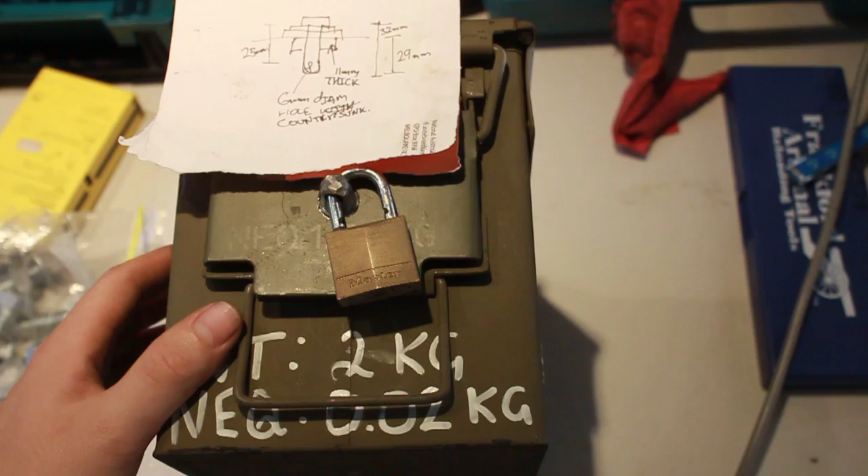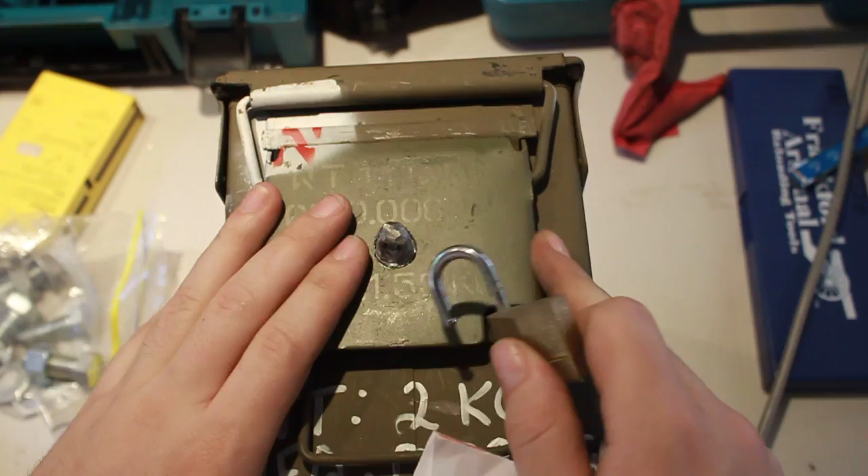Alright guys, I'd like to show you how I make these lockable ammo tins. What you'll need is a lock and an ammo tin. This one cost me $15 from the gun show. It's about the going price here in Australia, $15 for a 50 cal, $10 for a 30 or 20 cal.

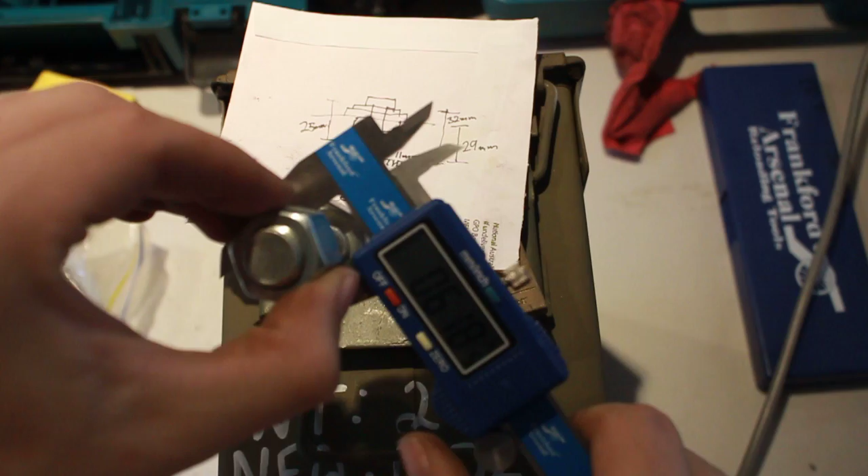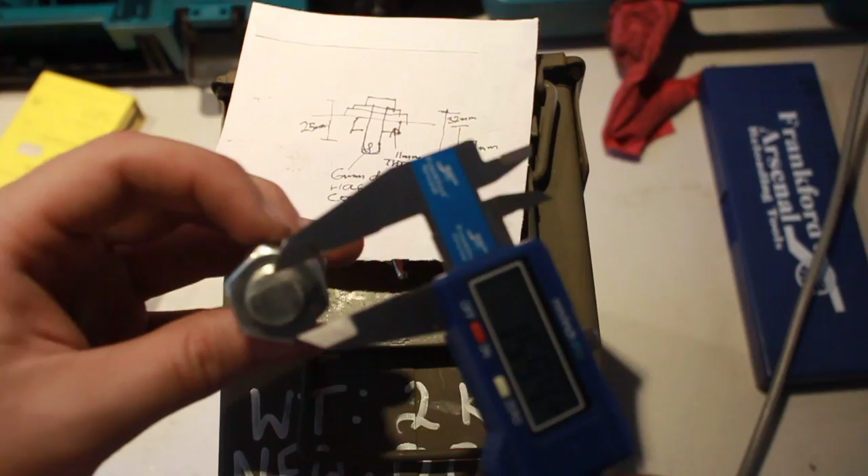Some nuts and bolts, fairly decent size. Let me get the verniers here. This is a 0.619 inch. We go to metric because that's what we use here. 15 mil nut, and the head of it, if you need to know the head, it's 23.

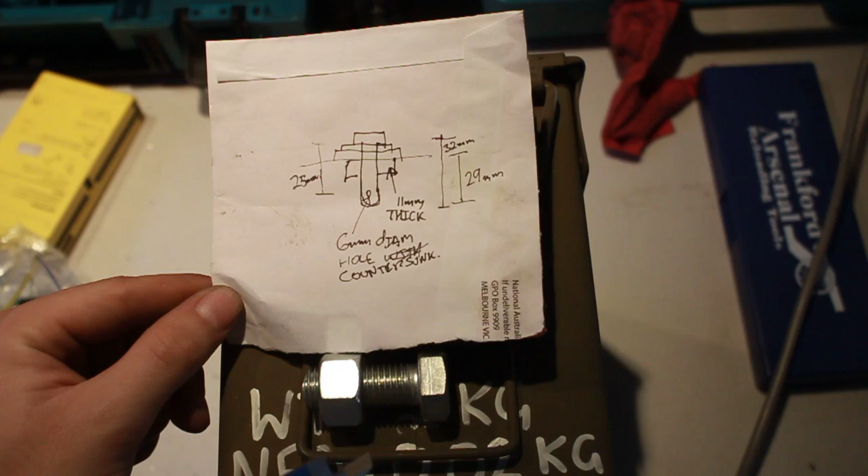You'll need a washer, and you'll also need one of these Fixaloo things. I'll show you where that goes in a minute. These are very rough dimensions, within maybe 3 to 5 mil error. So from there to where the hole goes is 25 mil, 11 mil thick this nut needs to be, 32 mil overall length,

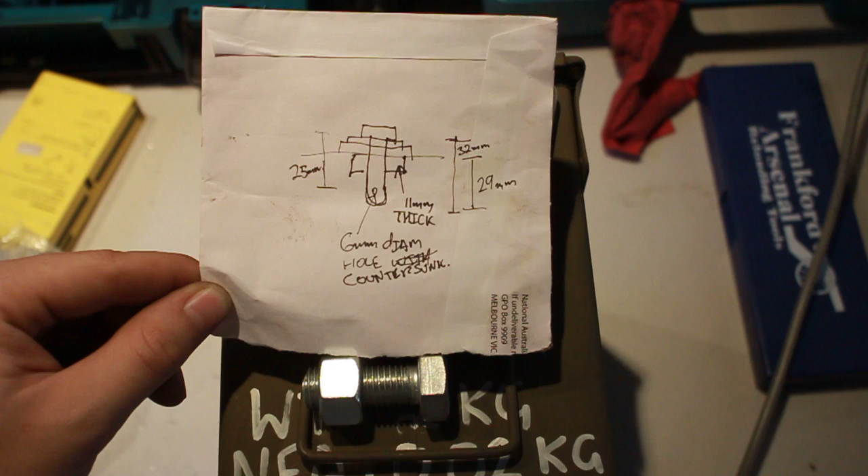and 29 mil from the face, and about a 6.3 mil hole. I think that is 1/4 of an inch in imperial terms. Yeah, 0.25. That's about right. Anyway, so you do that.

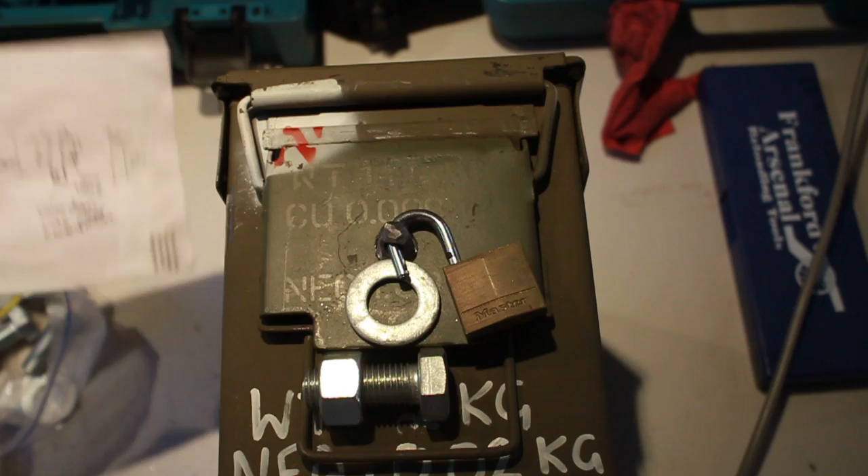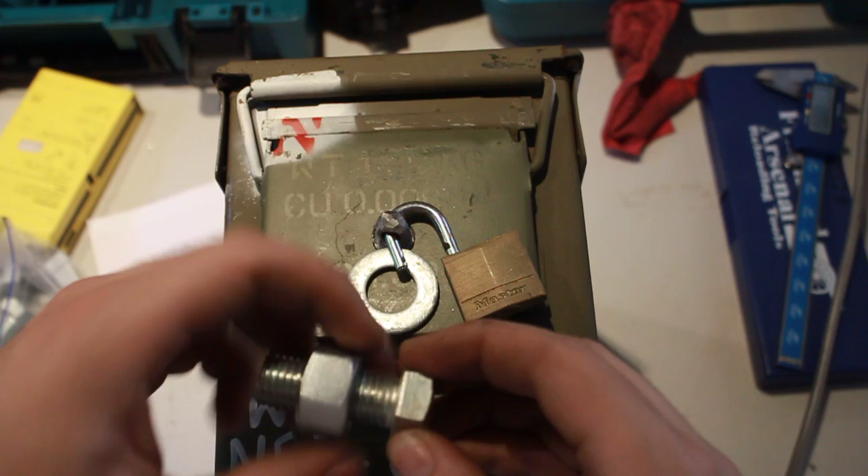You'll need to grind this nut down flat because it's too thick to fit between the top of the ammo tin there, like that. And it'll end up with something like that one there. And then you want to work out your overall length. You can try and use those dimensions I showed you, but they're very rough.

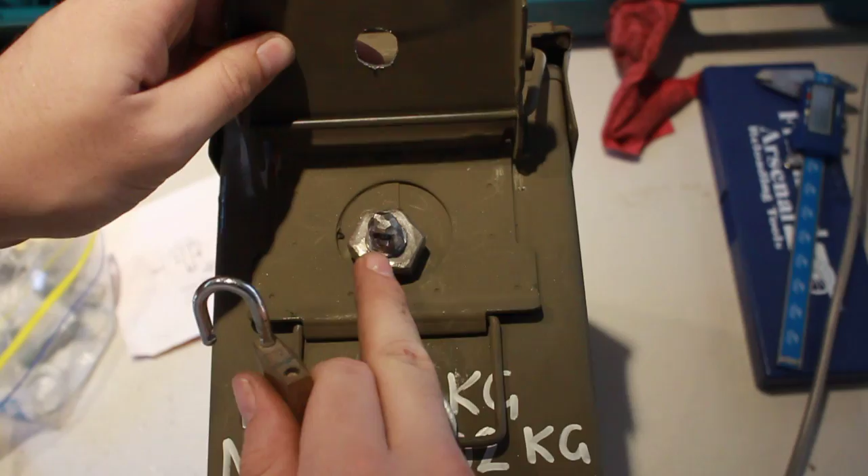Once that's thinned down, I'll use the other one just to show, you then want to work it out, place it all over, get your 2 washers in there, this washer and the rubber, and then work out how far out you want your hole. You want your hole pretty close to that, but always make sure you leave your thickness there. So it's sort of like that, then that lid goes on, and then you've got to work out how far up that hole has to come off the nut there. Alright, so that goes like that.

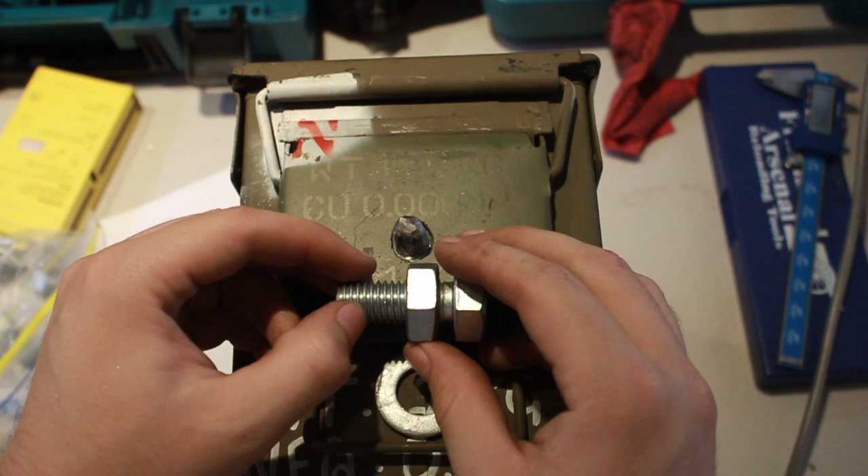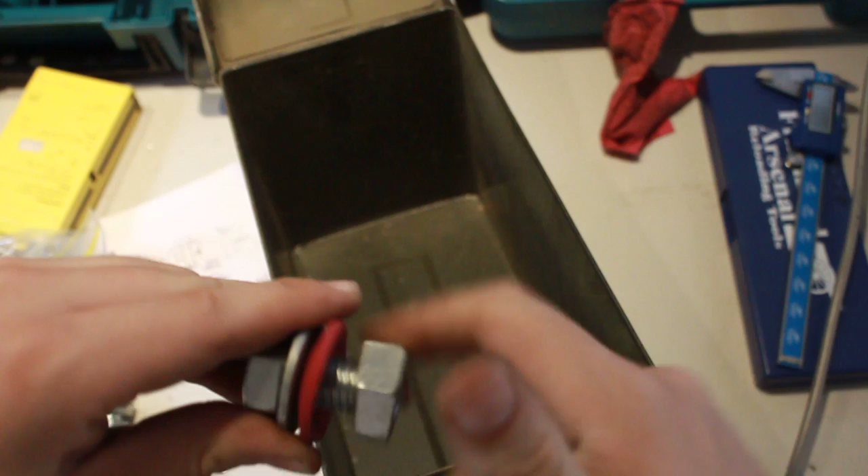So you've flattened your threads, drilled your hole, then you want to grind back all your threads. Leave your nut on the bolt, grind it all back, cut it down to length, and then start curving it, like I have here. Start cutting it back to size, like so, and then you've got a sort of knobbly end there, nice and round. Once you've done that, you should be good to go.

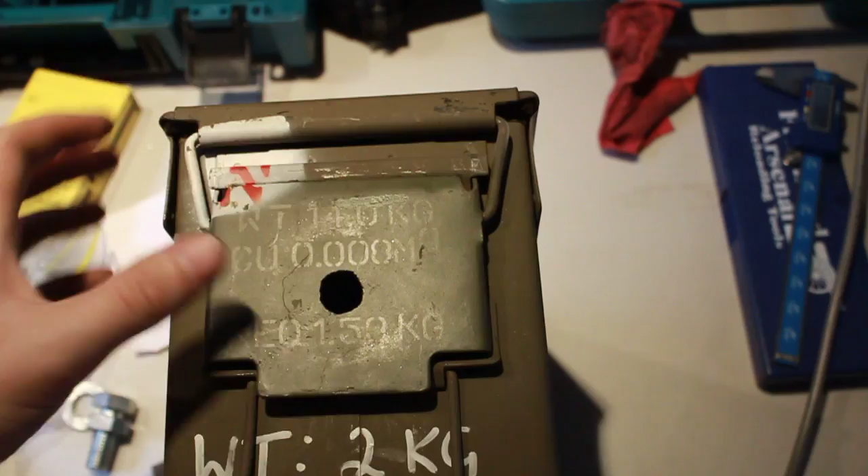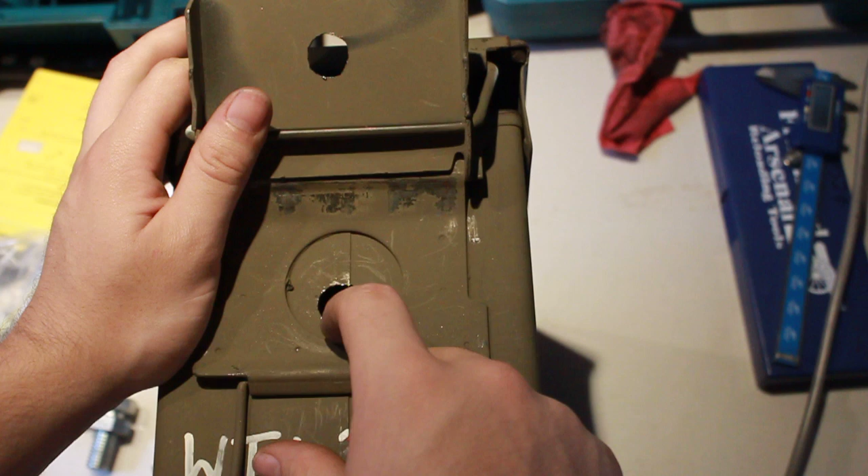Next step is to cut your holes. Originally this ammo tin had one hole here, smaller than that, and had no hole there. So tap your hole through, and then enlarge this hole. I used a jigsaw. Not the way to do it. I do not recommend it. Find another way. Whenever you're using tools, make sure you wear your earwear and your eyewear.

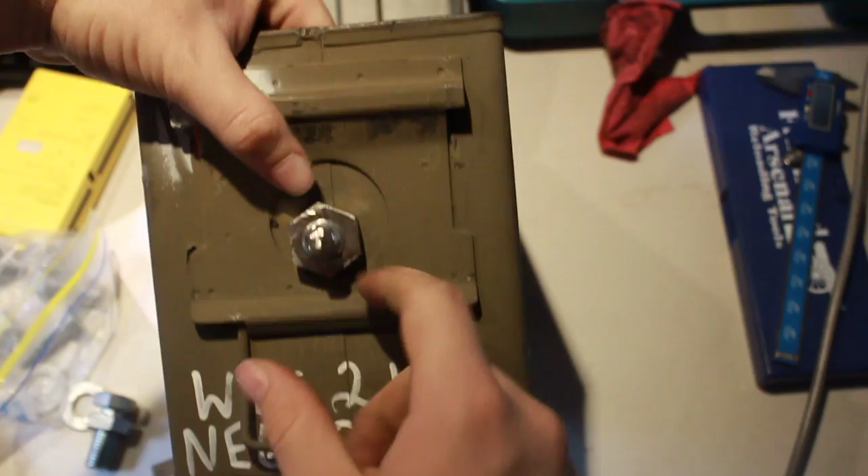Make your hole, and then make your hole there. Don't make this one too soon. Make that one first. Get your nut, bolt, and washer through. Put it on, like so. I like having my hole flat. And then close that. When you close it, you see where you need material removed, and you just remove that material. Assemble, disassemble, and keep doing it until it fits nicely.

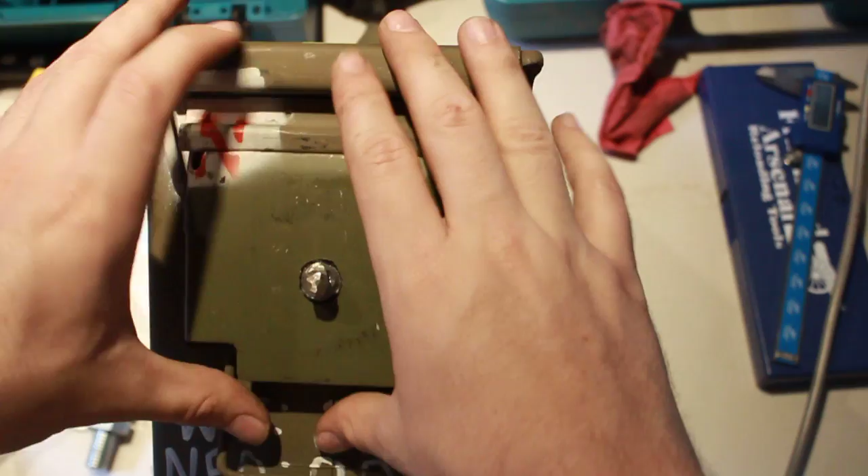So this fits quite nice now. You can see that's almost flat. I like that a little flatter, but it's within reason. And that's what your hole looks like. Now if you just drill a hole straight through, you may not be able to turn your lock. You may only just go that far on your lock.

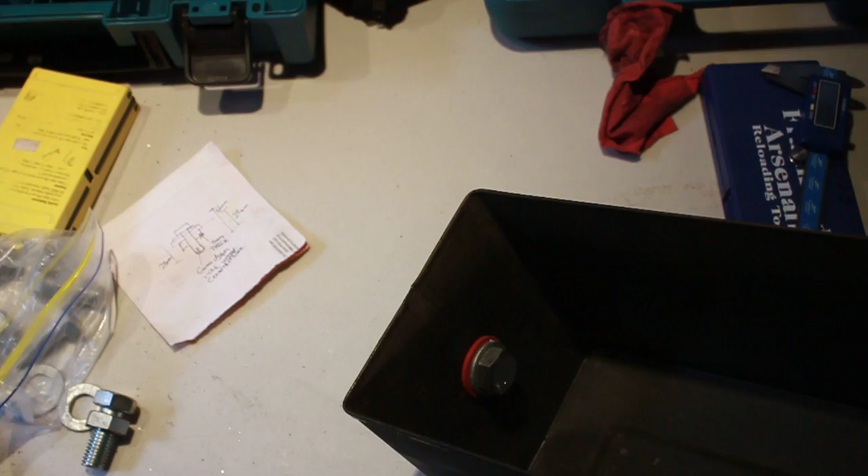But what you do is use a bigger bit, say a 10mm bit, and go around the edges in here. I've forgotten the word. Use your 10mm bit, only a little bit, and that means your lock will be able to move freely. Then you crank it down. Make sure you get it nice and tight so that rubber seal in there can stop the air and water coming in.

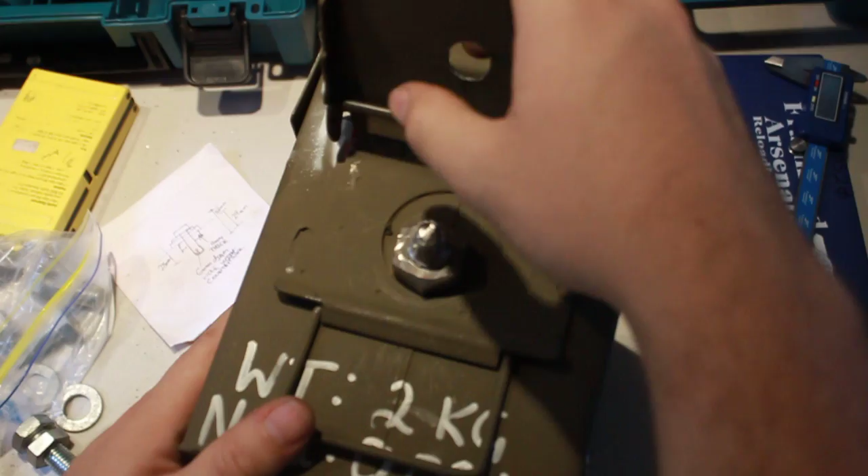So that's how I make my ammo tins to lock my ammo up. When you're looking out for an ammo tin, I like to open it, see how hard it is to open. This one's alright. Then check all your welds on the top. Then I check my seal all around on the inside, make sure that's all good. Then check your welds on the top of your hinges here, and after all that's done, pick the painting that you like.

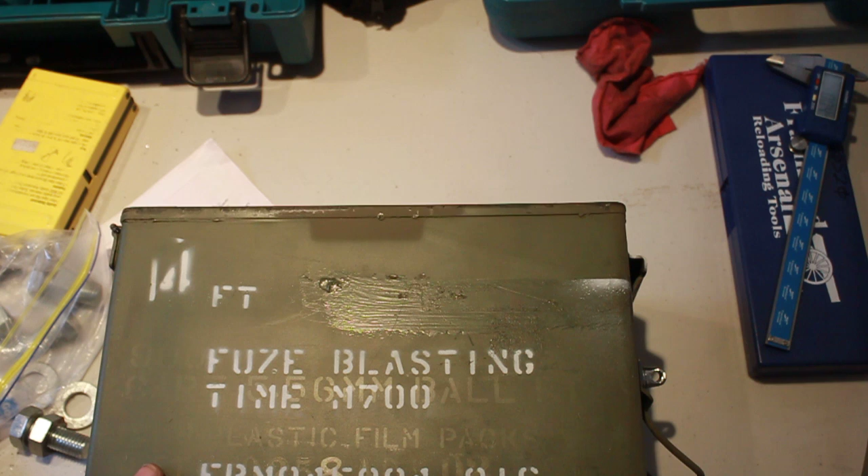I went for Fuse. This is made by ADI here in Australia. That's their explosive sticker that they've painted over. This is Blasting Fuze, Time M700. This used to have, behind there, 900 cartridges of 5.56 millimeters, so you can see what the old thing is, but it has been used for Fuse since. Now it's going to store ammo, projectiles, primers and all sorts of good fun things.

Alright guys, so that's just me showing you how I make my ammo tins.